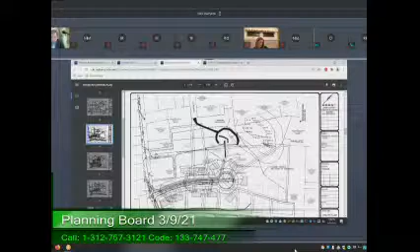Ron Brooks? Yes, John. This was originally a 13-lot subdivision, and it is now only 10 lots. I believe there are a number of ANR lots shown on the plan that have frontage on an existing public way — I believe that's three lots. So that would be 10 lots to be subdivided, plus the three ANR lots. As proposed, there were some utility connections and so forth through those lots through the subdivision. So they're all shown on the same plan, but three of them are ANR lots. All right, that was my question.

Thank you. Todd, do you have any questions? Yes, I have a couple of questions centered around sheet number 5 on the plans. First, I notice you have standard specifications for handicap ramps, but they're not shown on the plan. I want to confirm that you are going to be installing the handicap ramps where the sidewalk meets Eaton Avenue. Is that correct? Yeah, if that's a requirement, then of course we would be doing that. I don't know if the engineer wants to jump in, but that would be the intent.

Anything else, Todd? Yep, I didn't know if we were waiting for the engineer or not. The other comment I have is, on sheet 5, you show 13 proposed Norway maples. I believe Norway maples are on the prohibited plant list in the Commonwealth as an invasive species, and you cannot propagate or plant new ones, so you should check into that — you may have to revise the plans appropriately. Sure, thank you. And I think they're not Asian longhorned beetle resistant either, so that's something we will certainly look at and come up with an acceptable tree species.

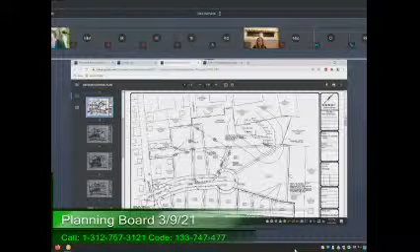I think I might be by myself here, but I don't know whether either Bob O'Neill or Joe Graham are on the line. If they could jump in to answer that question, it would be helpful. John, this is Bob. It's a 100-foot diameter, 50-foot radius. Joe Graham just texted - he's having trouble calling in, so he's trying to call now. But to the fire department, it would accommodate the turning radius for a ladder, if there's nobody parked on the street. I can let Graham address that further.

I think we can certainly look at it. I would say the fire department had received it. I would assume that if they had an issue with it, they would have told us. We could certainly look at it again, and we'll confirm that with the fire department. Not many people park on cul-de-sacs, I don't think, in terms of a parking space. But again, they'll have an opportunity, if they don't feel it's adequate, to let us know, and we'll take a look at that.

Todd, did you have anything else? No, that's all I have. Thank you. Okay, I have a couple of questions myself. Let me find my sheet numbers. On sheet 6, the grading plan.

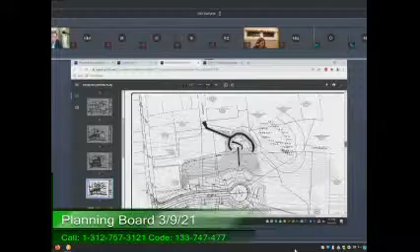Again, I think if that's a question for Mr. Graham, I believe they just said he's having trouble making the connection to get through. I would defer to him in terms of answering that. But again, if he's not able to get through, that would certainly be something we're going to be back before you on once we have the comments from Graves too, and I can add that to the list to make sure that he addresses that or has a response for the question.

Yeah, because most of my questions are engineering questions. Well, I'll say them anyway, just so that they're on the meeting minutes. Sure. Hi, Don, this is Joe. I actually was able to restart my computer and log in, so I'm here. I don't know if you heard the question. I didn't - I just came in at the end, at Don's response.

Okay, my question is that on the Hampton Street side of the development, the contour lines run parallel with the backs of the houses except for the first two. What is protecting those houses from the water running right into them? There's no mound. Correct. So those areas, the foundation is stepped there.

Obviously, you can see, but you're right - it is graded. The site is graded in general from that retaining wall up at the top, straight down to about the front of the house area. We can adjust the grading. The goal was to minimize the height of that retaining wall in the back to about a 4-foot wall. Any additional grading that we'll have to do will obviously increase the height of that wall. But that is something we can adjust, and unfortunately we'll just add to the height of that retaining wall up on the top.

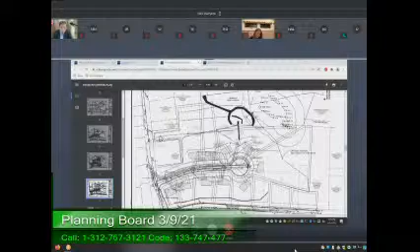My next question would be on your details on sheet 11, your typical trench detail. You call for select gravel fill compacted in 6 or 8 inch maximum lifts. That should be 3/4 stone around the pipe, not select fill, unless it's a water main. Okay, we can make that adjustment.

I'm assuming your sidewalks are bituminous and your wheelchair ramps will be concrete? That is correct, as well as the curbing is granite. Curbing around the whole site is granite? Correct, because of the radii coming in, as well as the radii at the bulb. So it's all granite curbing proposed.

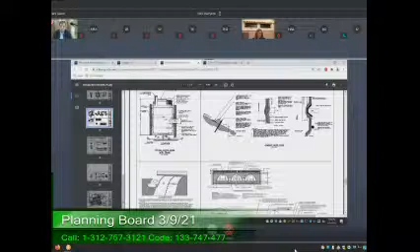And what is your typical profile cut on a sidewalk? I don't really see what the depth of your pavement is anywhere handy. Usually you give a profile shot of how much gravel's under whatever surface you're providing, whether concrete or asphalt, and how thick the concrete or asphalt would be. I don't see that, I believe that was on sheet 12, for the total cross-section.

Silt fence, hydrant, stabilized construction - I don't see one for a sidewalk.

Oh, on the top of that sheet, typical cross-section, Road A. Unfortunately they call it the detail cement concrete sidewalk instead of asphalt. I don't have it, but I can put the dimension of the 8 inches of dense graded base underneath that.

On sheet 12? The sheet that is up, yes, on the screen. I don't have that profile on my plans. That sheet does not look like my sheet 12. Yeah, Mr. Chairman, this is Todd, it looks like our sheet 14. It's your sheet 14? In my packet, it's sheet 14. Okay.

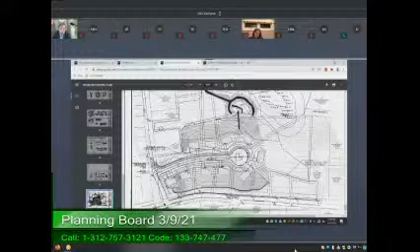Well, we have the typical section for the basin access, typical section for Road A, typical section for a driveway, and the riprap swale. And that riprap swale, according to this plan, is only showing a foot deep, not 4 feet. Down the bottom you have the schematic for the configuration for the infiltration basins and the Stormceptor manhole.

I think we already agreed that there's no dimensions on how thick the surface is of the material being used for the sidewalks.

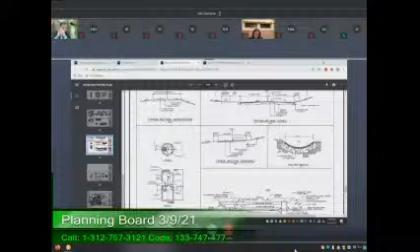And then back on sheet 12, on your hydrant connection, you call for the stone around the hydrant to be covered with plastic. It should be covered with filter fabric. Plastic will hold the water, won't drain as well. Okay, we'll make that update.

And then I didn't see a detail on your thrust block anywhere. I see them drawn in here, but there's no dimensions and no symbols of cubic yardage. And on your sewer manhole detail...

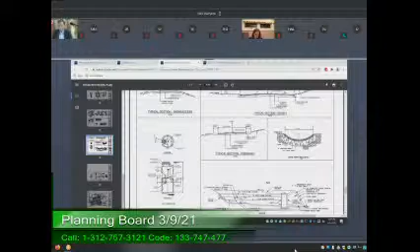It shouldn't be red sewer brick to raise the cover 12 inches minimum. That's a maximum. You go higher than 12 inches, it's hard to get in the manhole because the steps are too far apart then. Okay, we can make that edit.

And I'm not sure what the town requirement is for your inverts in your sewer manholes. I know you show a half inch per foot, but some towns like them to the top of the pipe, some like them halfway like you have them shown. I'm not sure what the town requirement is for that, but I like to maintain continuity if it's different than what's on here. All right, I'll run that and let you know, confirm.

Okay, and then your frame and cover doesn't exist. LeBaron Foundry no longer exists, hasn't existed for probably 8 years now. So you're going to have to refer to something else. East Jordan, yeah, I believe that's an old standard detail that I thought was updated to East Jordan Ironworks.

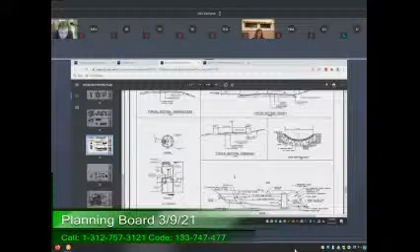Your typical catch basin with frame shows compacted gravel underneath it. That should be, or 3/4 inch crushed stone. It should just be 3/4 inch only.

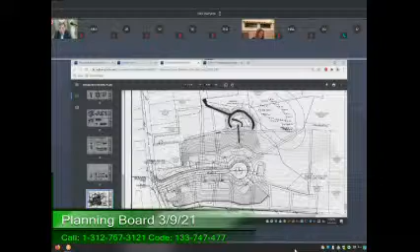And your sheet 14, the typical driveway section - I'm not sure if all the driveways look like this, because it says typical driveway section, or just some of the driveways look like this. I don't know. Because this is looking 90 degrees to the driveway, I believe, if I have my section correct.

Yeah, all driveways are proposed to be the typical section because it's crowned.

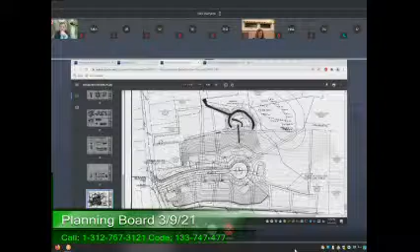Okay, and in your riprap swale detail, you call for compacted gravel, 8 inches of processed gravel. I'm assuming that's compacted.

Who's going to check the compaction rates on all this material you're putting in for the roadway, for the sidewalks? Who does the compaction test? Because it should be right around 96% to be industry standard. The contractor installing the roadway would have to provide Yankee testing to come out and verify that they're building this in accordance to the standards. Okay, I just want to make sure somebody was going to do it.

And I believe those are the only questions that I have, or comments. I think, hang on just a second.

Yeah, I didn't see the pipe velocities under general engineering, line 40. It says pipe velocity will be provided as part of the revised stormwater plan.

The incorrect pipe slope has been adjusted to provide more realistic values. I don't know what the slope is. I know what the manholes are, we already just talked about them. You said there's a drop manhole in there, so if you add that to the profile to show the difference in slope, that would be great.

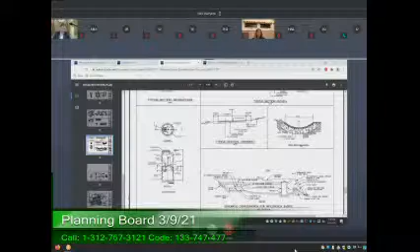There's nothing else on the agenda until we get to other business. And discussion of the town meeting warrant, duplicate chapters, Roman numeral after Roman numeral. I'm not even going to try to decipher it, I'm too tired. Section 1, purpose of the renumbering, section 7.6.

I believe that was supplied in our packet from Adam, and I'll let him take over from here. Thank you, so I just want to kind of update the board on town meeting articles.

The board might be familiar with these, these were considered last spring. We were going to bring them to town meeting, but because of COVID, we dropped all zoning articles for spring town meeting last year.

These particular articles are kind of housekeeping articles. The duplicate chapters, 14 through 18, these zoning bylaws all exist in the town bylaws, so these are extraneous bylaws. The town bylaws are more up to date than the zoning bylaws, so this is kind of housekeeping. We want to take these out of zoning and clean up the zoning bylaw.